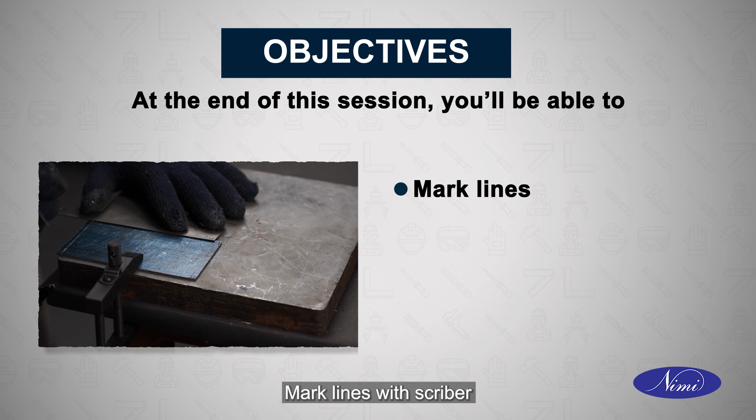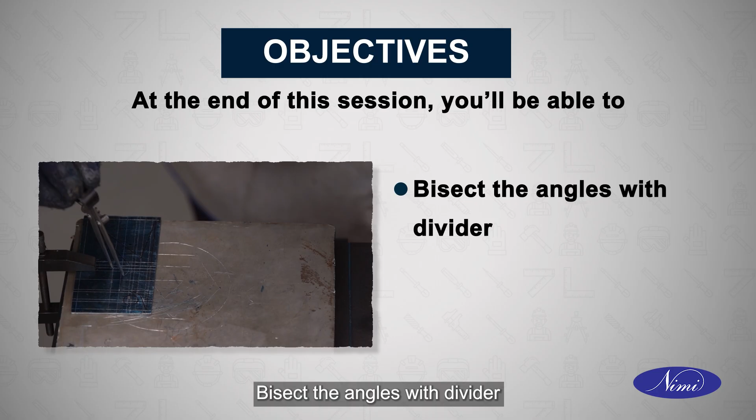Let us look at the objectives of this session. At the end of this session, you will be able to mark lines on metallic surfaces with marking block, mark lines with scriber, mark angles with bevel protractor, bisect the angles with divider, draw circles, arcs and tangents with divider and scriber, and register the profile with dot punch.

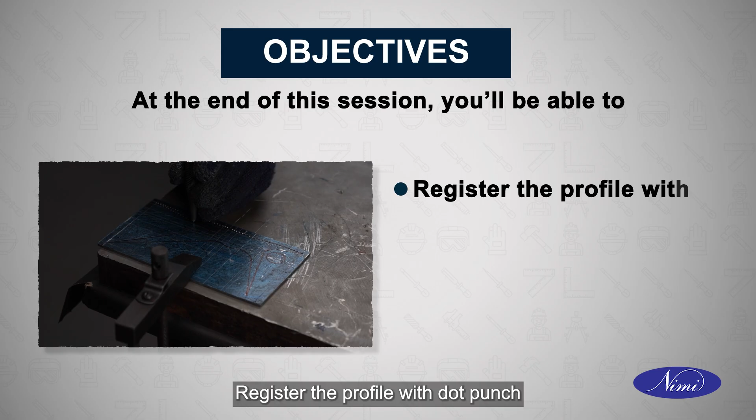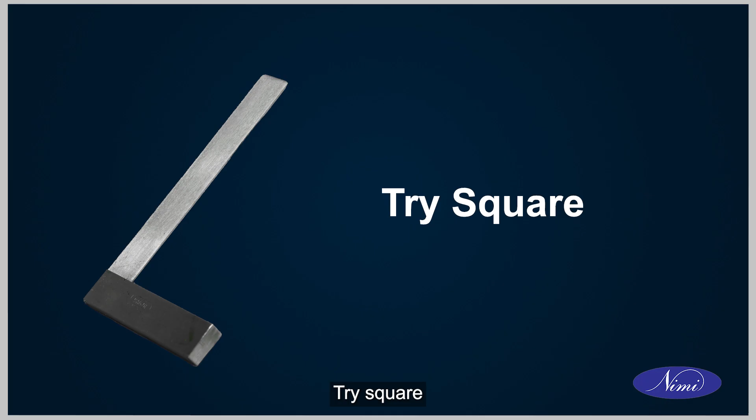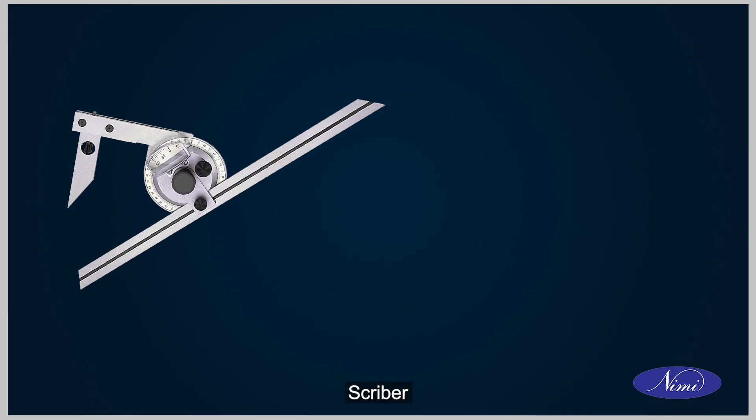Let us learn the procedure for joining straight line to an arc, task 2. The tools required for this exercise are steel rule, try square, hacksaw frame with blade, divider, vernier caliper, marking media, different grades and sizes of files, surface table, angle plate, vernier height gauge, dot punch and center punch, ball peen hammer, anvil, bevel protractor, scriber. Check the sheet metal for its size using steel rule.

File all the faces using bastard file to remove burrs. Ensure parallelism and perpendicularity using a try square.

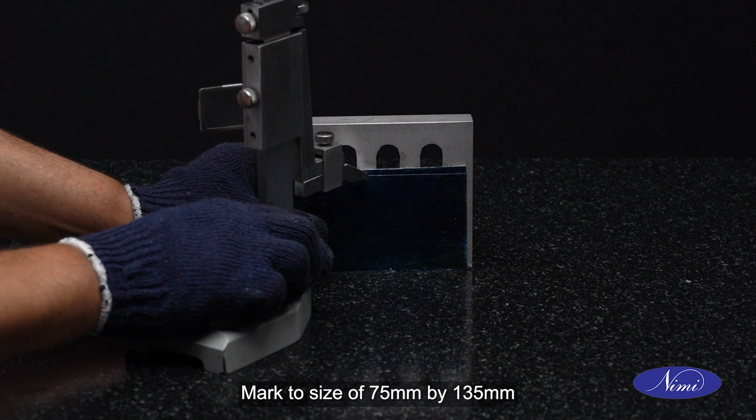Apply marking media cellulose lacquer on face A. Mark to size of 75 mm by 135 mm as per the drawing using vernier height gauge on a surface table with the help of an angle plate.

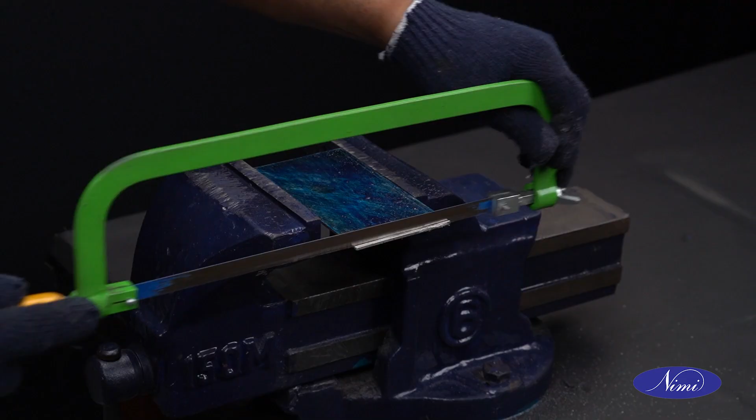Hacksaw the excess material. File and finish to the respective sizes using bastard and smooth files.

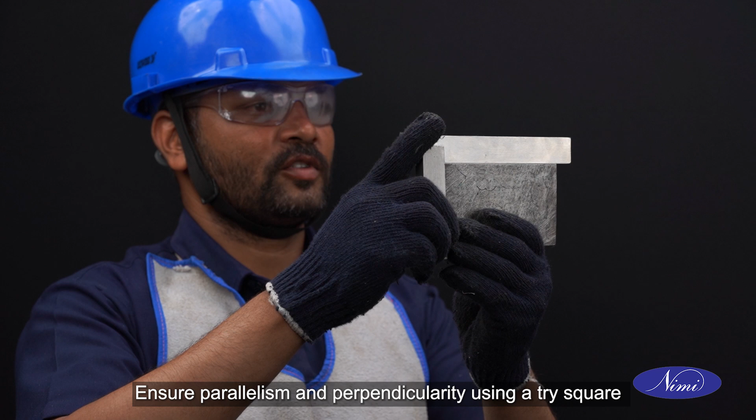Ensure parallelism and perpendicularity using a try square. Check the dimensions using vernier caliper.

Clean the surface table with oil. Clean the angle plate, vernier height gauge, bevel protractor and place them on the surface table.

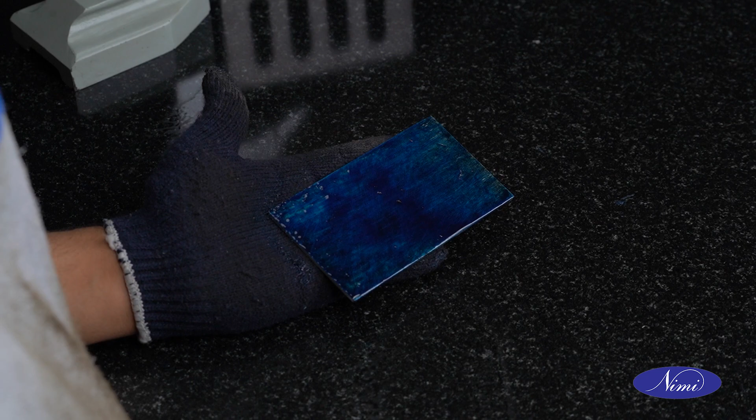Apply marking media on face A. Place the job on marking table and support it with angle plate.

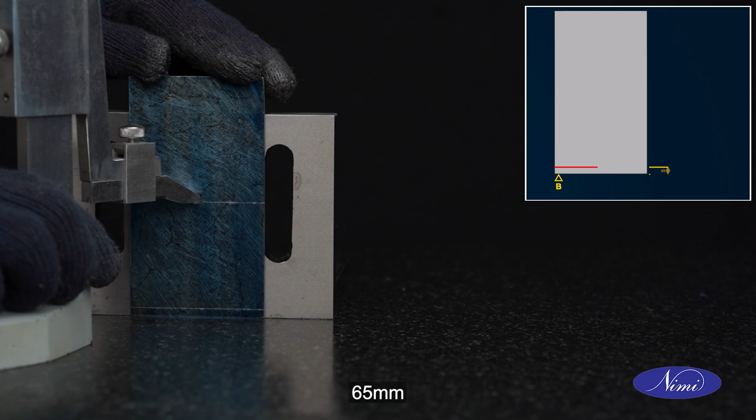Draw lines from face B at a distance of 5 mm, 65 mm, 70 mm, 74 mm and 90 mm using vernier height gauge and an angle plate.

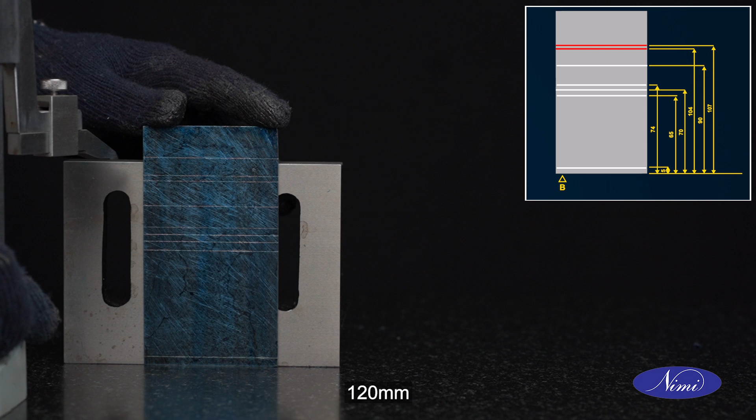Similarly, draw lines from face B at a distance of 104 mm, 107 mm, 117 mm, 120 mm and 130 mm using vernier height gauge and an angle plate.

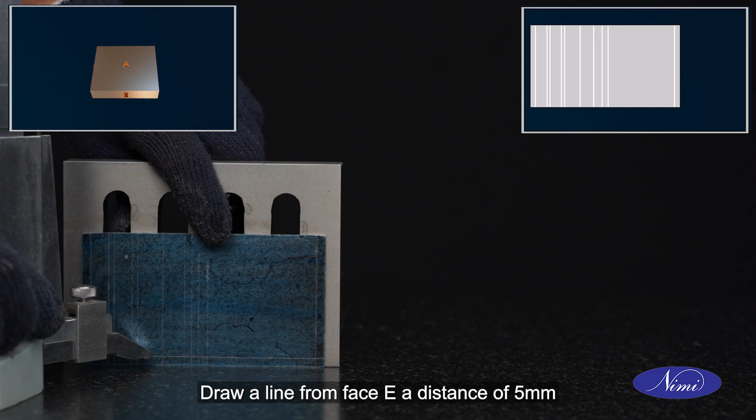Draw a line from face E at distance of 5 mm, 8 mm, 15 mm, 20 mm using vernier height gauge and an angle plate.

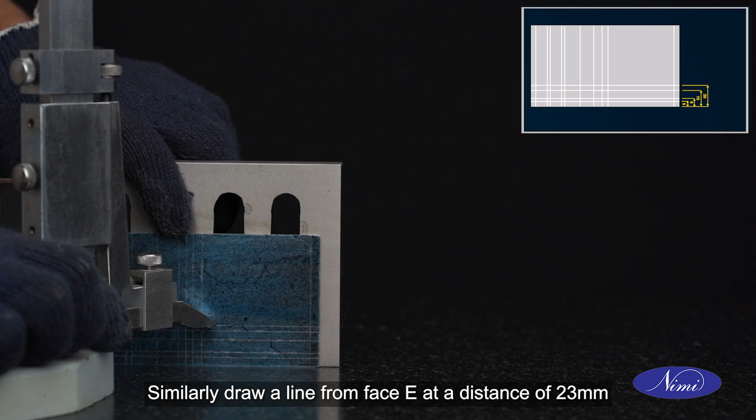Similarly, draw a line from face E at a distance of 23 mm, 32 mm, 40 mm, 70 mm and 75 mm using vernier height gauge and an angle plate.

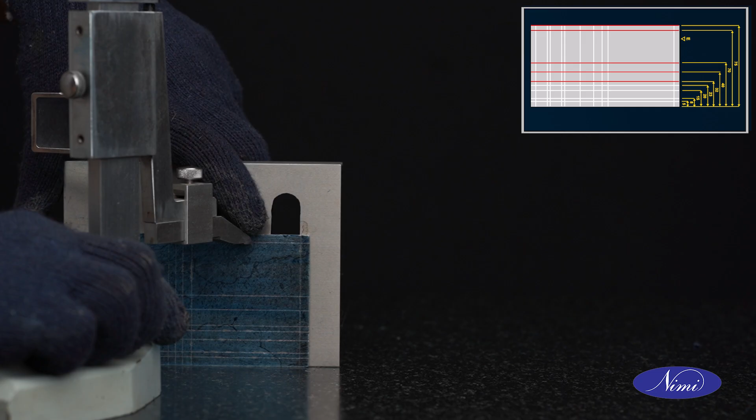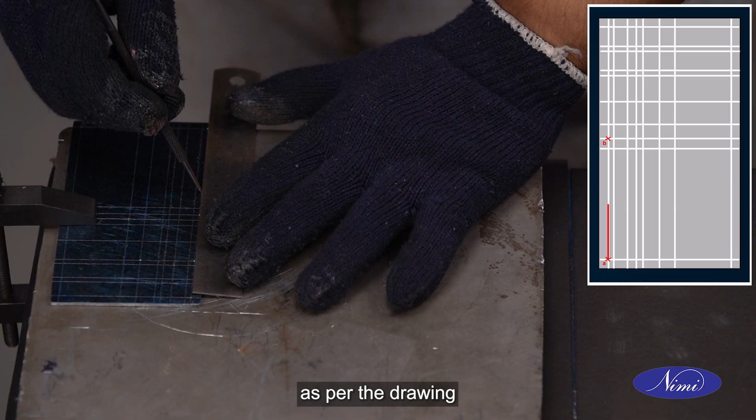Refer all these points to create the required profile. Draw a line from point A to point B as per the drawing using steel rule and scriber.

Draw a line from point A at 10 degrees to the line AB to obtain point C using bevel protractor and scriber.

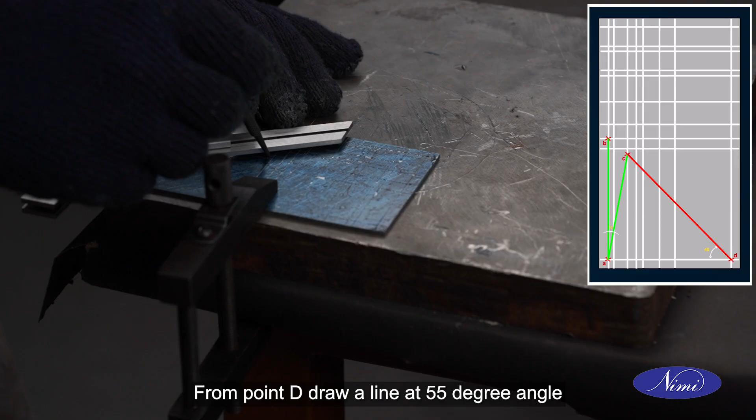From point D, draw a line at 45 degrees to meet point C using bevel protractor and scriber. From point D, draw a line at 55 degree angle to obtain point E using bevel protractor and scriber.

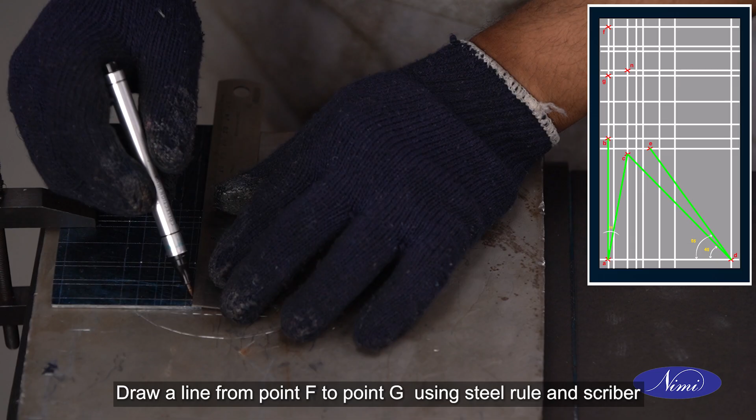Draw a line from point F to point G using steel rule and scriber. From the circle center H,

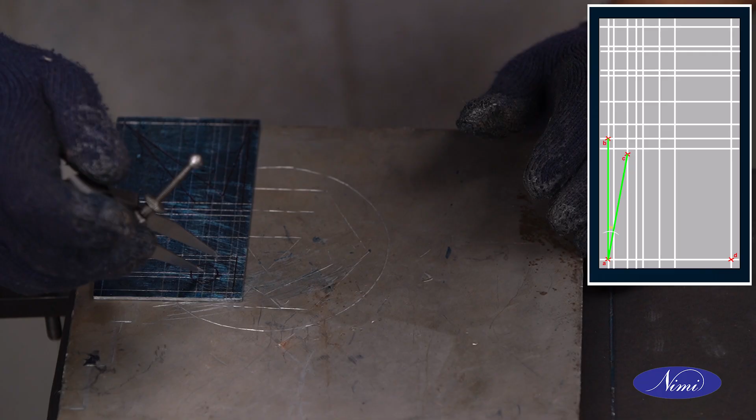draw a circle of 13 mm diameter using a divider and a steel rule. From H as a center, draw an arc of 10 mm radius using a divider as per the drawing.

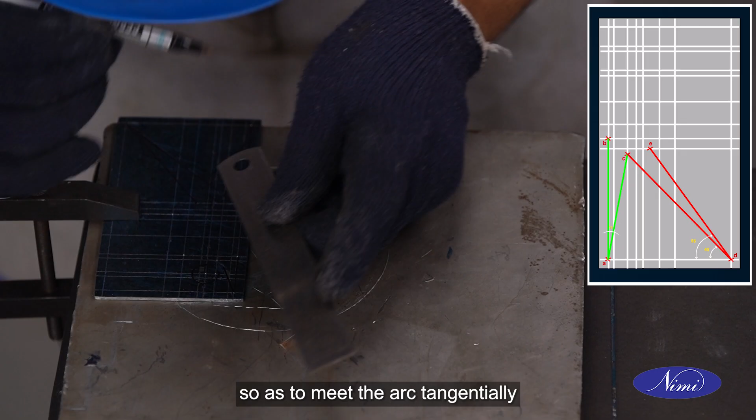From point F, draw a line at 19 degree to the line FG so as to meet the arc tangentially using bevel protractor and scriber.

With point I as the center, draw an arc of 15 mm radius so as to meet line ED tangentially using a divider.

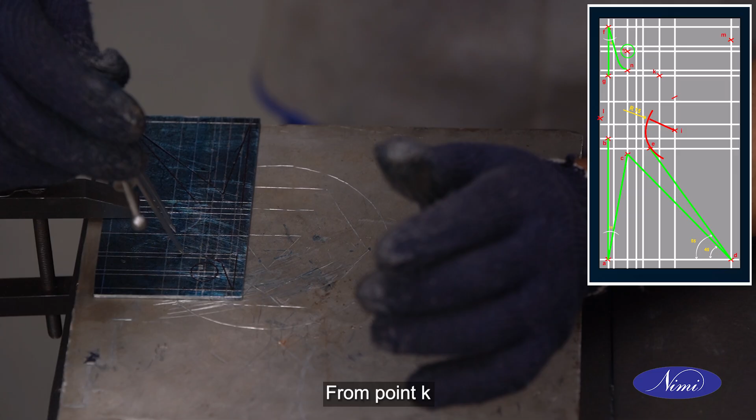From point K, draw an arc of 15 mm to obtain point J, which will be the center for the second 15 mm radius arc using a divider.

From point J, draw the second 15 mm radius arc so as to cut the previous 15 mm radius arc using a divider.

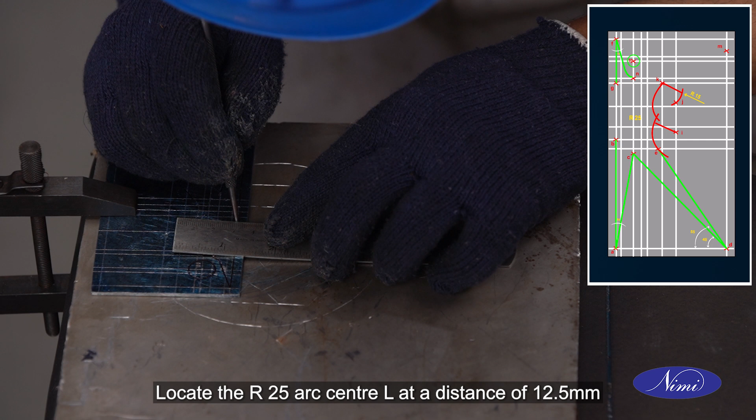Locate the R25 arc center L at a distance of 12.5 mm above point B and 4 mm to its left.

Draw an R25 arc from L so as to tangentially meet the two R15 arcs using divider.

Draw an arc of radius 130 mm using a template to connect point G and B using a divider.

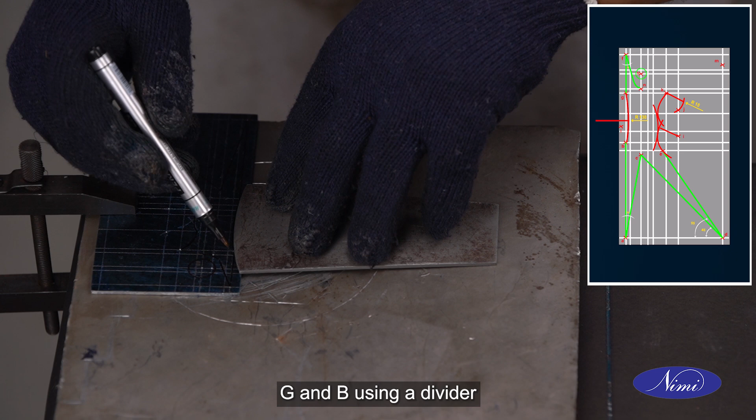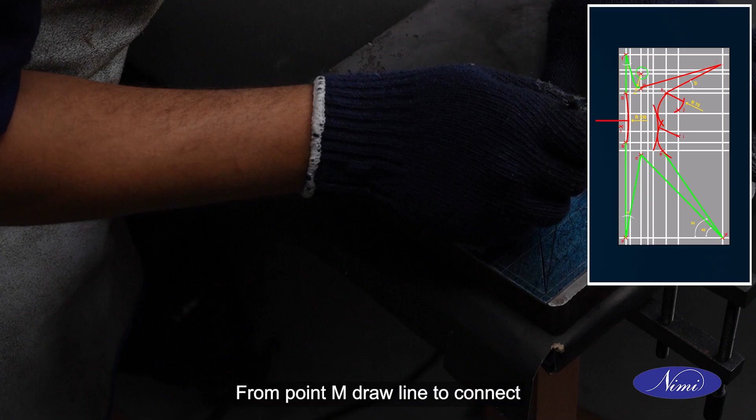From point K, draw a line of 25 degree so as to obtain point M using bevel protractor and scriber. From point M, draw a line to connect R10 arc to point N using a divider.

Witness mark the profile using dot punch and ball peen hammer on an anvil.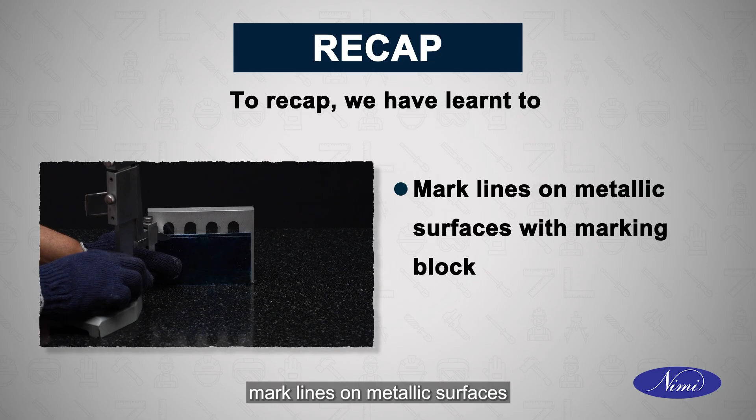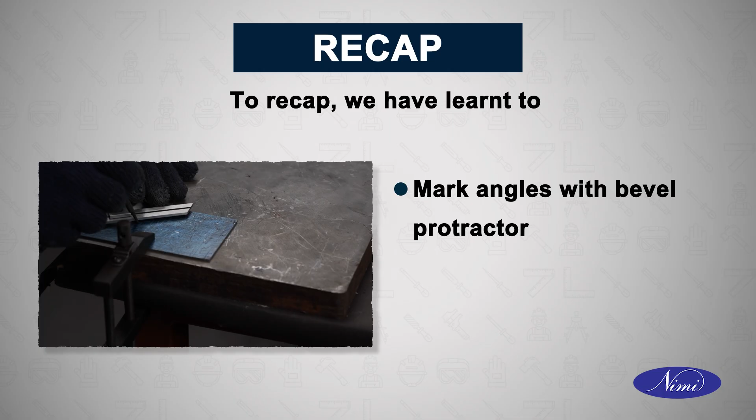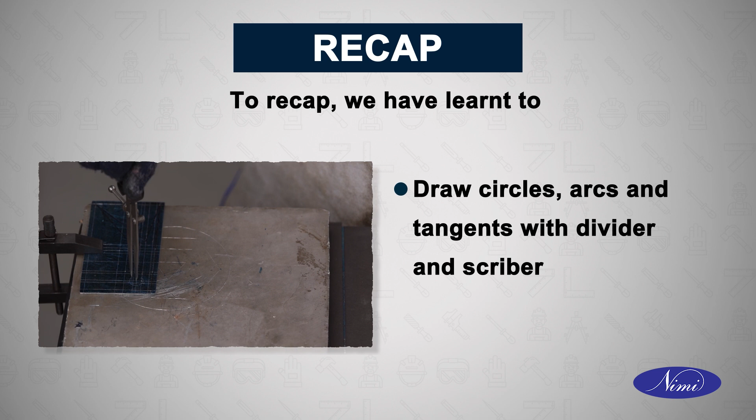To recap, we have learnt to mark lines on metallic surfaces with marking block, mark lines with scriber, mark angles with bevel protractor, bisect the angles with divider, draw circles, arcs and tangents with divider and scriber, and register the profile with dot punch.